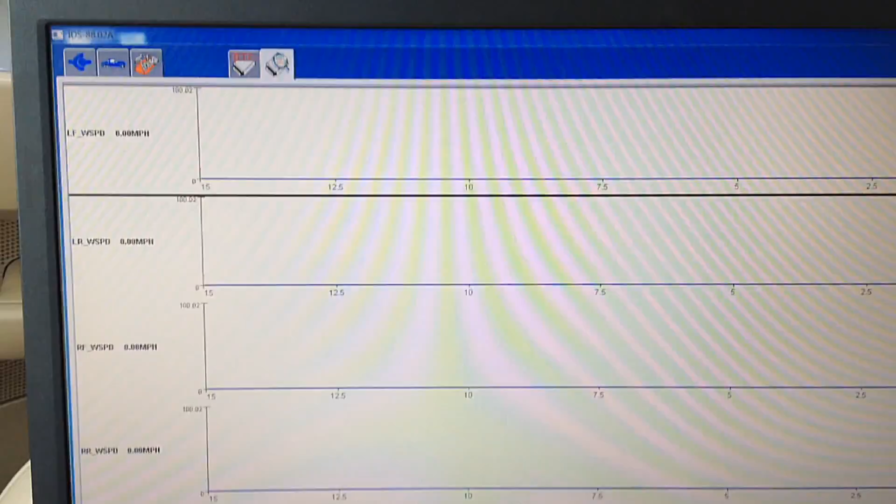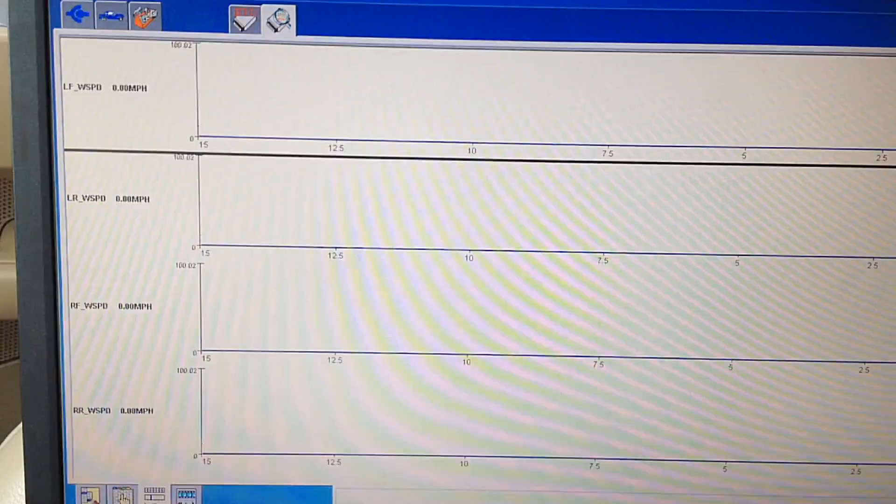Today I got a 06 Explorer, and it has a couple different things going on, but the main concern is the ABS light's on. And also, when the customer goes to pull out, let's say in traffic or whatever, and go to take off, the sensor on the right rear is acting up, and it's activating the traction control. Like it's a traction control event, but it's a false event.

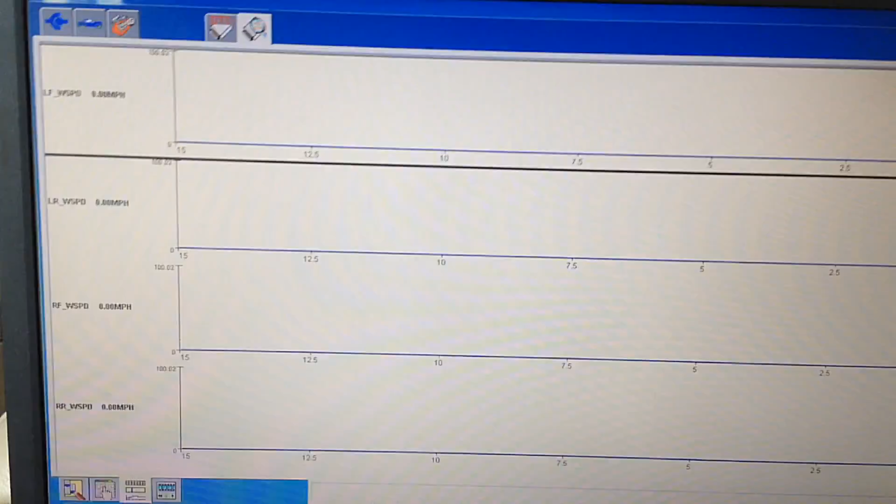And I'm going to go for a drive here in the lot real quick and show you the way it's pulsing pretty consistently. I'm thinking we have a cracked tone ring. The rear tone rings on these Explorers, the new ones. The old ones we had no problems. On the new ones, 06 on to 10, we had problems with the cracked tone rings. Mainly 06, 07. And in the rears only.

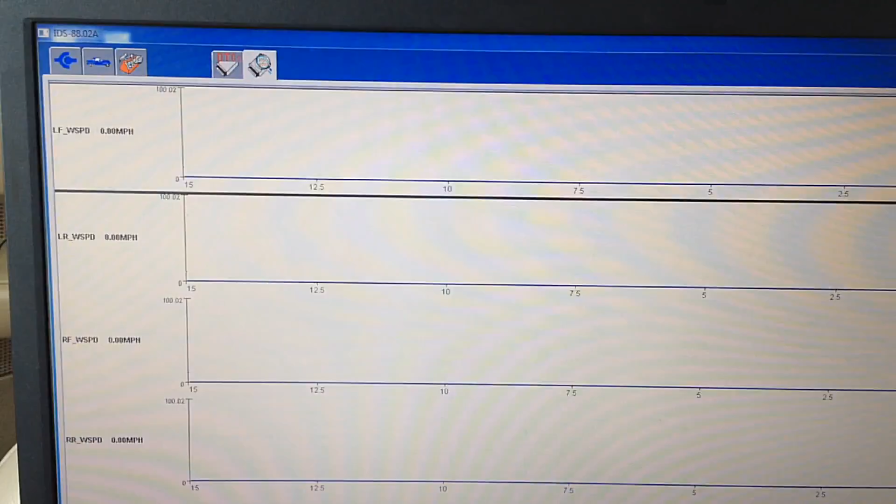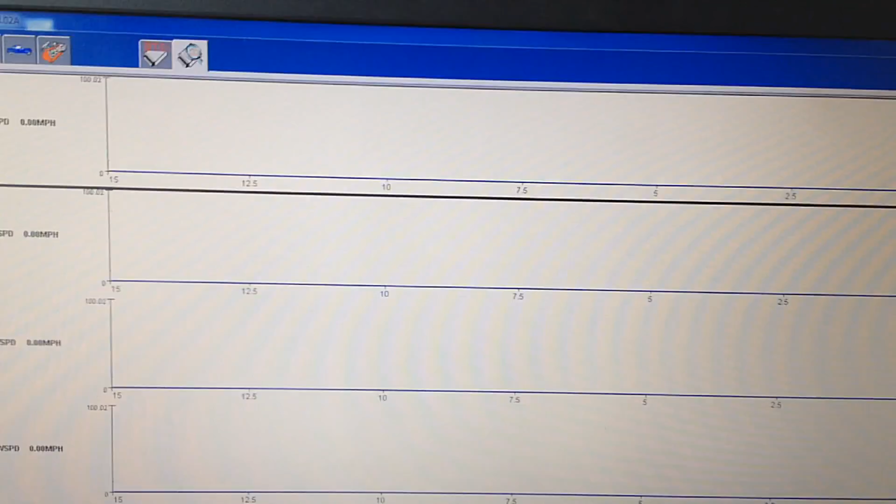So the one we're looking at is the bottom one, the right rear, and you see the rest of them come up, they're smooth, they're mirroring each other. Same thing, and then the bottom one's just twitching and it's dropping out pretty consistently, like there's a crack and a gap in the tone ring. So I'll go for a drive here.

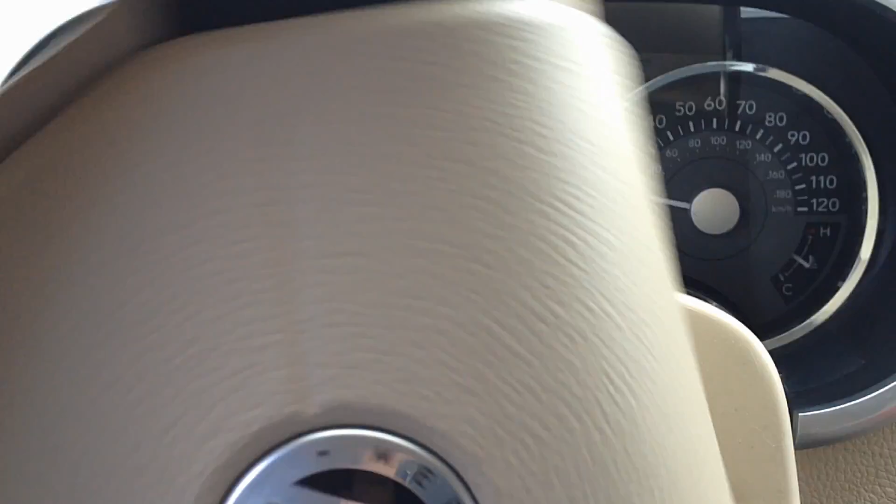You can see it's activating it, even though we're on a perfectly dry road. It's got no ABS lights as of right now because it's reading it enough. And it's causing that traction control to come on, which can be pretty dangerous going out into an intersection or whatever. So it's a good idea to get it fixed.

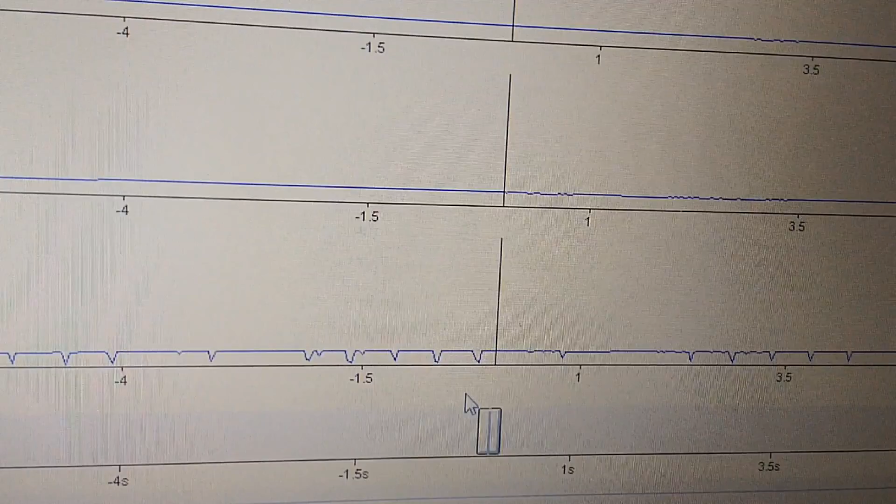So as you can see, for this right rear sensor, it's dropping out pretty regular on there, as long as I kept the speed right. That one. You can see the dropouts. This is what the module is seeing, whereas these ones are smooth and the module sees no problems. Well, the module software is kind of dumb.

Yeah, it flagged the codes because at some point it lost it for too long, but at this point it thinks, hey, that wheel's slipping, or that wheel's locked up, and it'll just activate that traction control or your ABS when it's not required. It's a false activation.

So this is pretty consistent with a tone ring that's cracked and has that wider gap between the teeth, and it doesn't induce any voltage, and therefore it drops out like that. Whereas otherwise it's fine, and these ones are of course fine. So I'd say let's go back to the shop and we'll check it out and see what's going on back there.

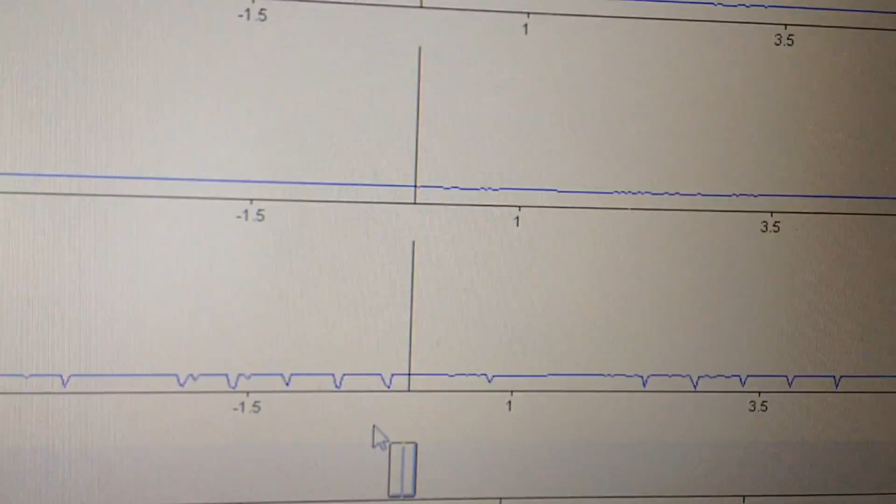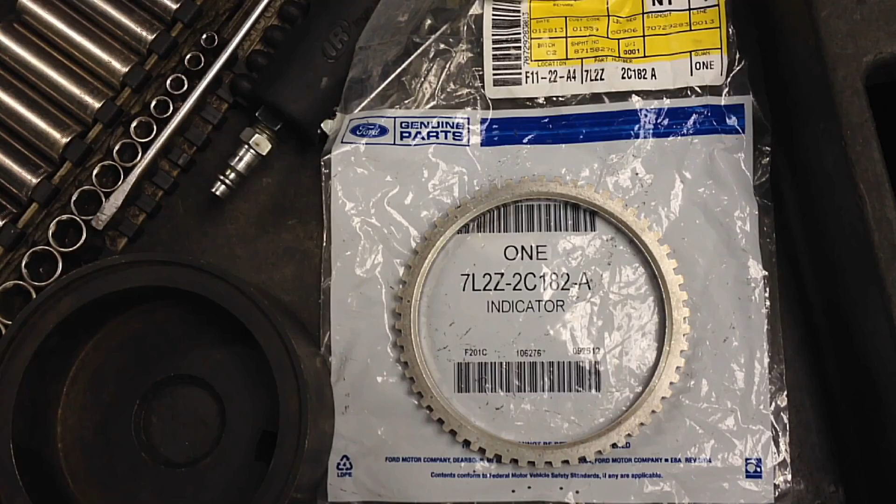So I crawled underneath here, and the first thing I noticed is that the tone ring was loose, which obviously is because the ring cracked. And I looked on the other side and I could see it cracked right there. And that's that extra large gap that you're seeing in the scan tool as being a dropout.

Alright guys, the Mountaineer came back to get the tone ring put on. We got it in stock now, and I'm going to attempt to film it best I can. I know most parts of it I'm going to need two hands, but you'll get the idea and you'll be able to change it out yourself, since especially on 06 Explorer, Mountaineer, doesn't matter, 06, 07, but especially 06, they've got that real problem with the rears cracking only. And it's a common enough problem. Figured I'd show you how it's done.

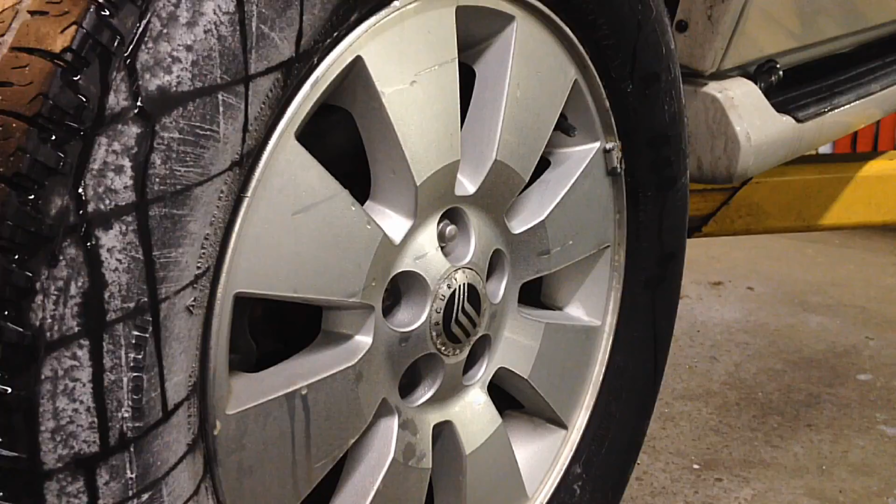First things first, take your tire off. They're 19 millimeter. Get that out of the way. Alright, next we need to pull the brake caliper off. There's a 10 mil here and down below. Undo those, and then we're going to compress the caliper a little bit.

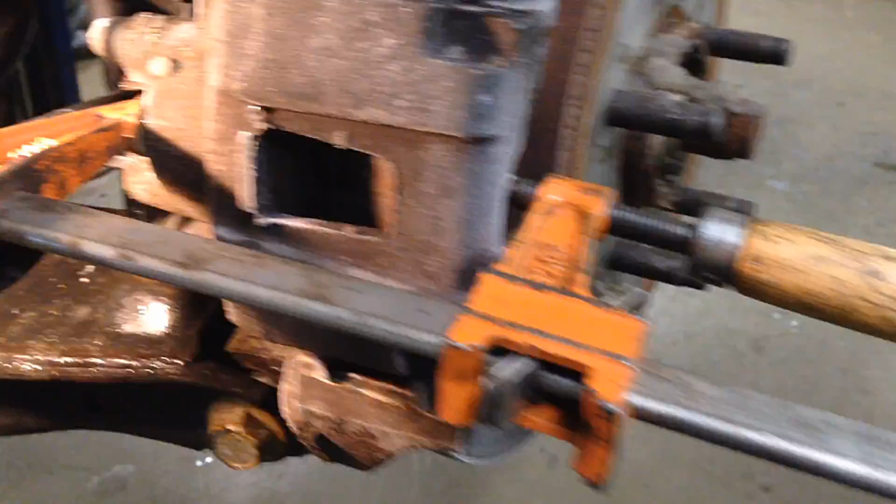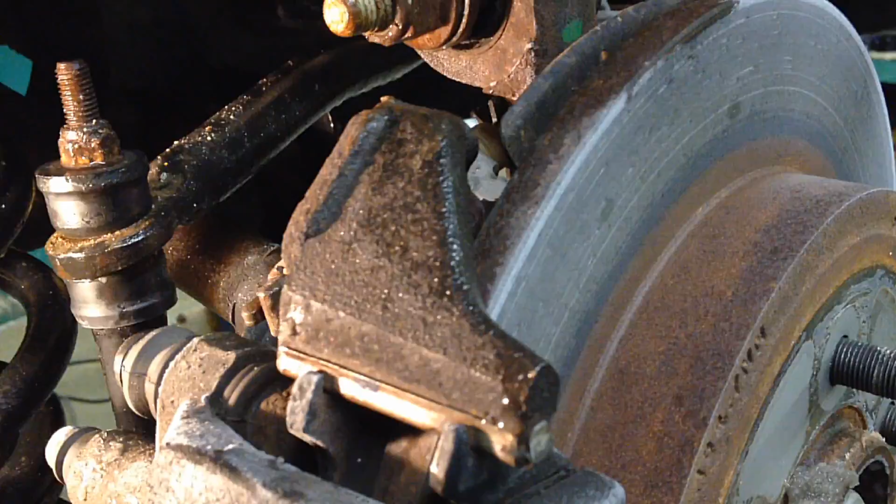Now we're going to take our C-clamp or wood clamp, whatever you got, just like that. We're going to compress it just a few turns and push it in just a little bit so we can get this out of here without it dragging on the rust ridge. Get something down here where the anti-rattle clip is and compress it up, and then pull on the bottom part of the caliper at the same time, and then the whole thing will just come out like that.

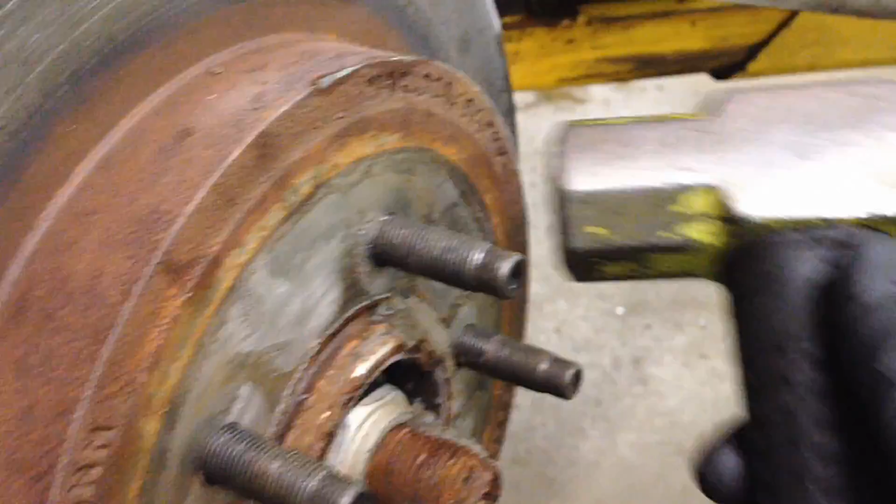Right here you can see that cracked part where it's separated just a little bit better than earlier in the video. You can see it. And once that's cracked, it loses its press-on fit and it moves. Next thing we need to get off is the rotor. Give it a slight hit with your hammer, and that'll break it free from the rust bond.

No matter how good or bad this stub that sticks out from the half shaft looks, always spray those threads with some kind of rust penetrant. Let it soak for a minute or so. Once the rotor is removed, we can pull the axle nut after it's soaked for a while. It's a 35mm.

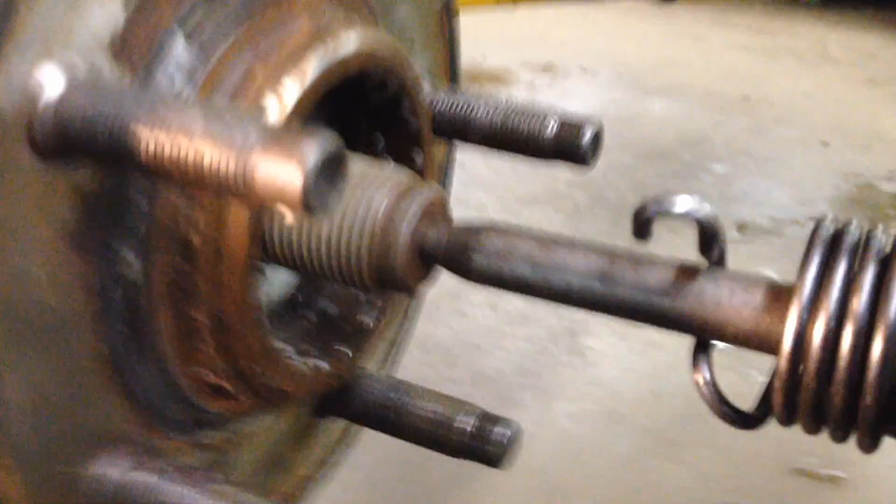After the nut's off, we need to press that axle shaft back in. I use an air hammer right there in the center. Works perfect at vibrating it out. This top bolt, loosen it, but don't take it out.

They're 15/16. Okay, we're underneath the vehicle now on the back side of the hub there. This bottom toe link right here, we're going to back the bolt out. Like so. Just enough. And you shouldn't take the nut off. It's 15/16 both sides again. And leave it in like that.

And that is just getting it back in there so we have access to these bolts, which we need to take out to flip that knuckle up. So we're just pushing this back to get it out of the way. Alright, pull these 3 hub bolts out. 1, 2, 3 that hold the knuckle to the trailing arm here. They're 13/16 and they're really in there tight, so be ready for them.

Alright, back down to the ground here. Put a jack under the lower control arm, right underneath the spring here. And support, got a little cup to it right there. And then this should be the last bolt we need to do before we flip this whole thing out of the way. It's a 15/16.

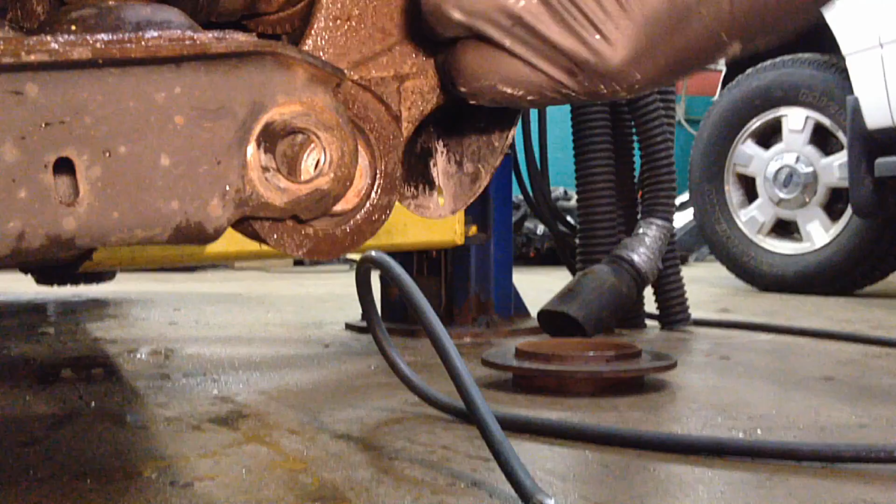Should be able to take it out with fair ease if you got the spring pressure off, like I do. Just a couple pumps up, and it takes the pressure off this whole assembly. And it'll hold it, and then we can flip this out. Now you'd be able to take this whole knuckle and pull it out like this and up. Let's see if I can do this. Push in your half shaft at the same time.

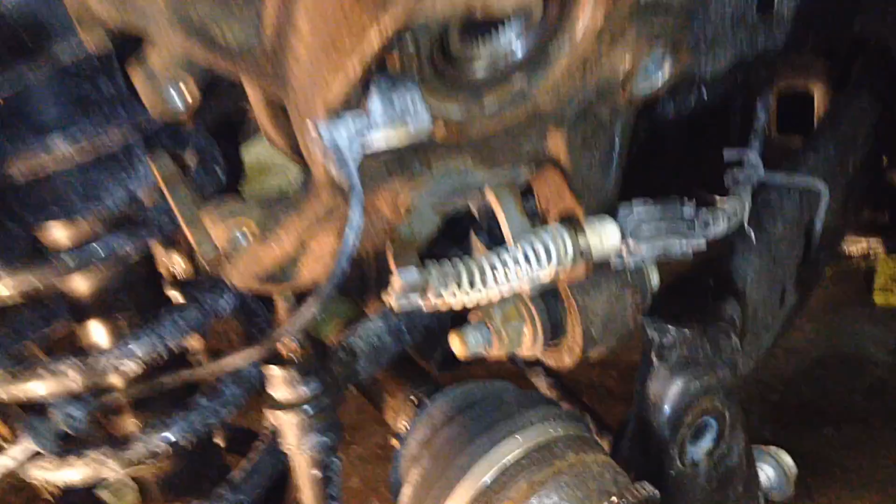See, hopefully, get out of there. Better angle. Right up and out of the way. Alright, so once you got it loose from the lower arm, those 3 bolts are out, you flip it up. Just like that. The way I got it staying there, this is fine. It's not going to kill the bushing while you're just doing this real quick.

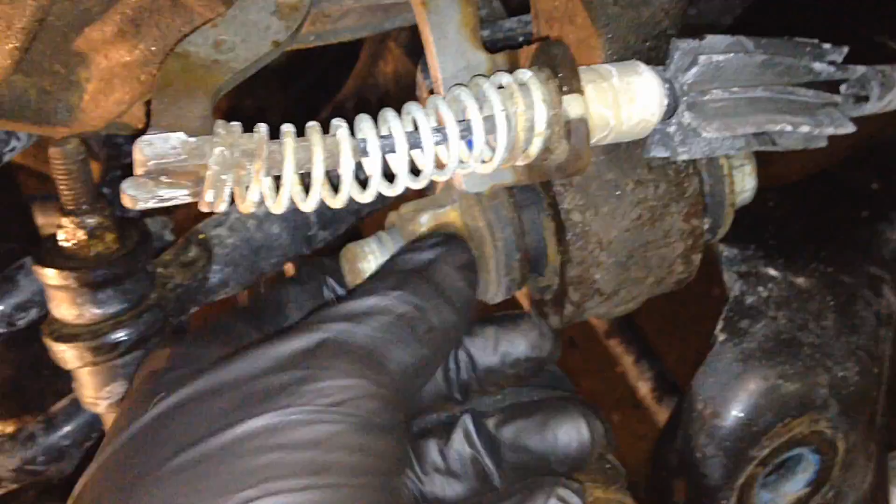This 15/16 on both sides that you loosened earlier, the bolt that goes through there, flip it all the way up. All the way up. And while it's all the way up, cinch this bolt back down. And it'll hold it up for us. Now if yours is cracked like mine, it'll literally just fall off like this. And then right here where it seats, this isn't heavily rusted, but you still want to clean it up. Scuff it up, and then we'll clean with brake clean.

Alright, I got it cleaned up enough. I put a real slight amount of grease all the way around. Just going to keep working it all the way around. Real slight, and it helps ease on the new one. It's not going to cause it to slip off or nothing like that. Just a real light coat. I mean, you're pressing it on there pretty tight, so...

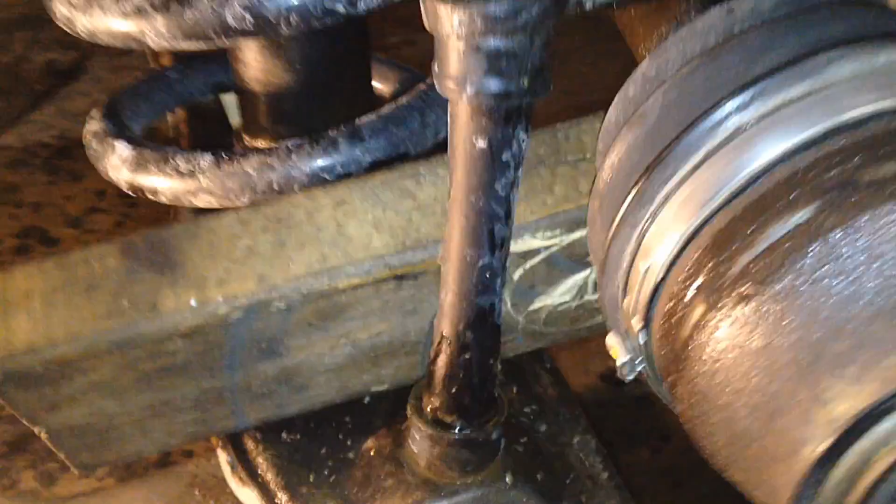Now it's time to press that ring on, and instead of fighting this end from flopping around and being sunk down in here, a regular old 2x4 back in there, on the shaft, and it goes on top of that toe link, and it supports it so that you can press that ring on properly and do a good job.

Now what you can do is heat up this tone ring with like a propane torch, nothing too hot, and get it a little bit expanded, and then you can tap it on all the way around with the hammer evenly. Just be patient and it should go on.

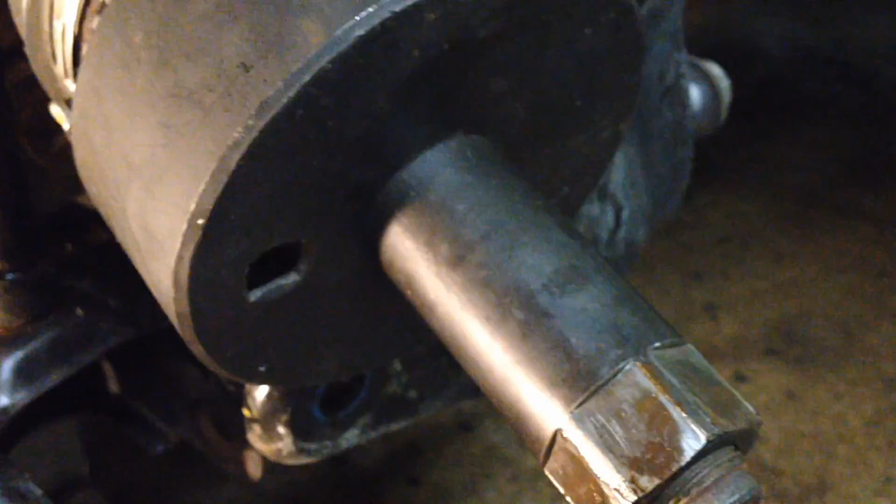We got the fancy press tool from Ford. It's a forcing screw and the disc here that actually cups that ring just right, and this centers it so that it goes on there nice and even. We're gonna go back to that ridge right there. You can see where it stops. Use that as a guide.

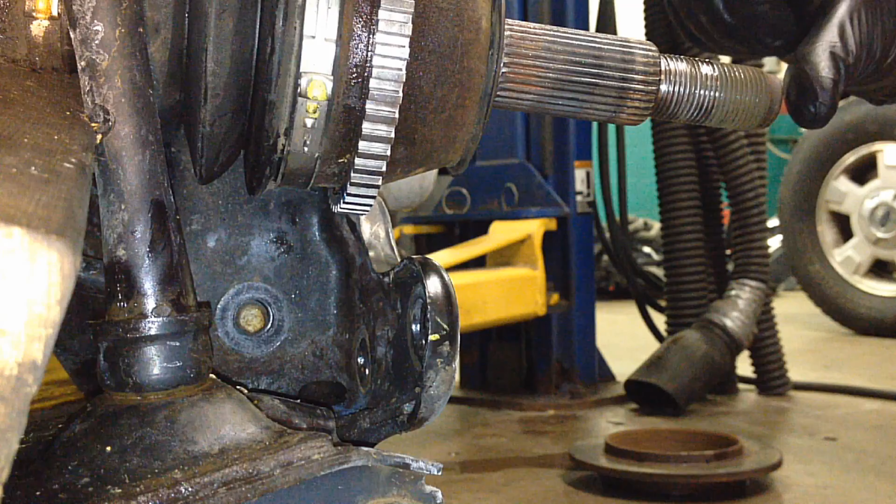Now the spec for this is 150 millimeters from the absolute end of this to this side of the tone ring. I put something flat against the end, and this thing's exactly 150 millimeters. It's plus or minus 1 millimeter, and I'm right at 150. Yeah, actually it's perfectly 150 right now. And that was just a guess. So we're good.

These, unlike the Escapes, can't go all the way back till they stop. You actually have to measure them. And I suggest you get a ruler with millimeters on it. Top bolt up here that you pinched off earlier to hold the knuckle up. Loosen it up again.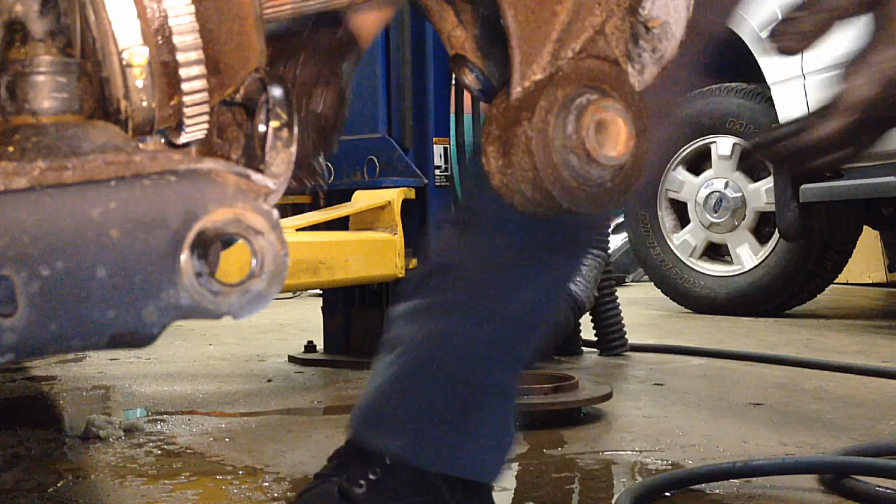Made it back up again. Get it through there and splined. Lower your knuckle through the lower arm here. We can line that bolt up and get it back in there.

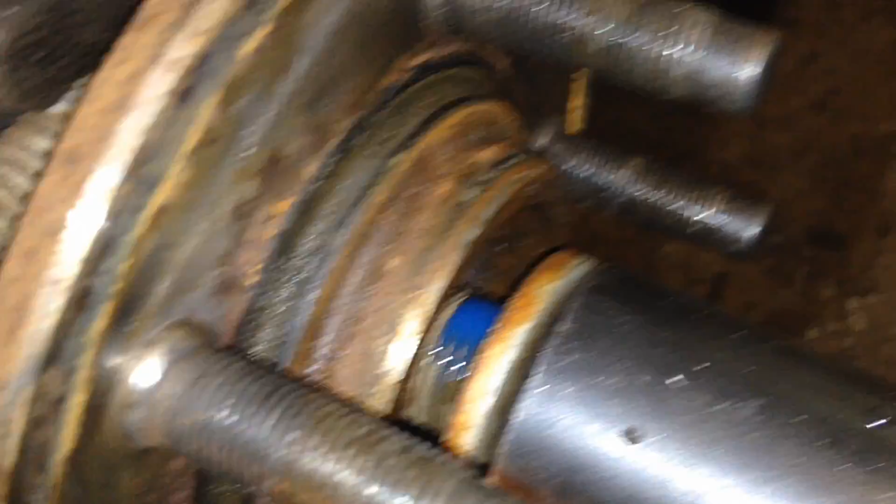Might tweak it a little bit, and I'll go through the other side, and then you can put your captured nut back in there. This sticks into the arm, kind of like this one, but on the other side. At this point, we can do a pre-check of our alignment by fully sucking in this half shaft. And if you're going to reuse the nut, make sure you put Blue Loctite on it. We're going to cinch it down, and then we'll torque it again later on once the weight of the vehicle's on, like it specifies. So let's cinch it down.

Okay. Now we can check the alignment of the sensor, and it should basically be centered. I mean, it'll pick it up. And you can see this one's perfectly centered, and we'll get a good read from that tone ring.

Back underneath here, we need to get these 3 bolts back into that knuckle, to the trailing arm. Get your first one by moving the trailing arm around, and then we can worry about tweaking the knuckle up to get these other 2 in, and we'll use this one as a pivot point. So get this first bolt in, thread it in, you know, halfway at least.

So what I do to get that top bolt lined up, we'll do the next easiest one to get to, is get a pry bar, and you're on the upper toe link up there, and then you're prying against the lower toe link right here, and you push towards the front of the vehicle, and it will move the top part of the knuckle to the rear of the vehicle, and it will align that hole, and you should be able to get that one in by hand, no problem. And now this one should be lined up.

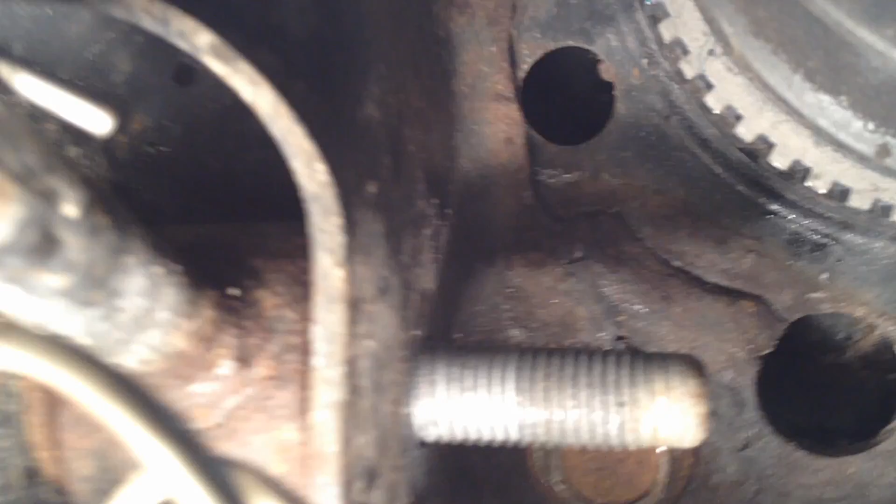Once you got all three of these in, tighten them up, put Blue Loctite on them. They're 203 foot-pounds. Once you got those 3 bolts in and torqued down, Blue Loctite, tap your lower toe link back in. And then put the nut on it, but don't tighten it at this time.

Once again, jack it up, all the way up until the full weight is sitting on the jack, so we can compress the spring and get it back to ride height before you cinch down these bolts, which puts stress in the bushing, so we can put them at a neutral position at ride height.

Once you got it up, this bottom one for the lower control arm is 205 foot-pounds, and this one, the lower toe link, is 260 foot-pounds. This top toe link bolt is 166 foot-pounds. Do it at the same time. Again, use Blue Loctite on everything that you're going to be reusing, any bolt you're reusing.

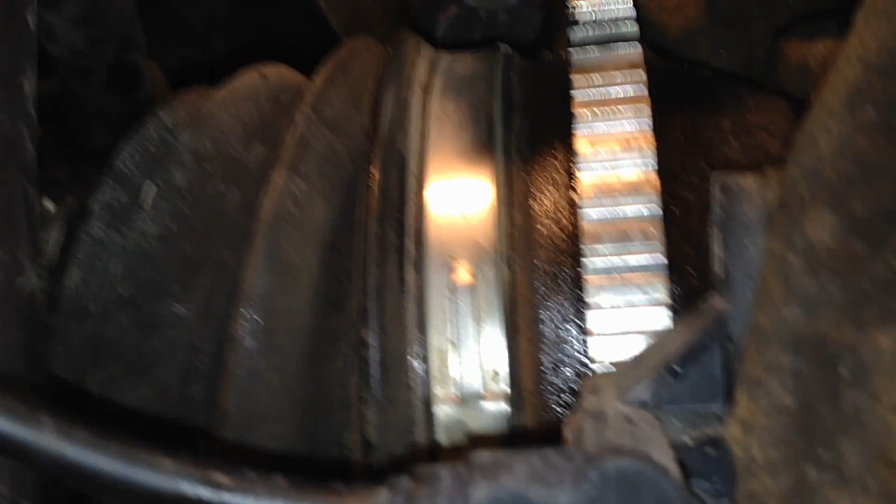One thing I just want to note is that this one on the driver's side, I looked at them, compared the two. The ring on this one's a lot smaller and thinner and all that, the stock ones. And then you could see our new one, it's a lot beefier. So this should cure the problem and be the last time you got to press one of these on.

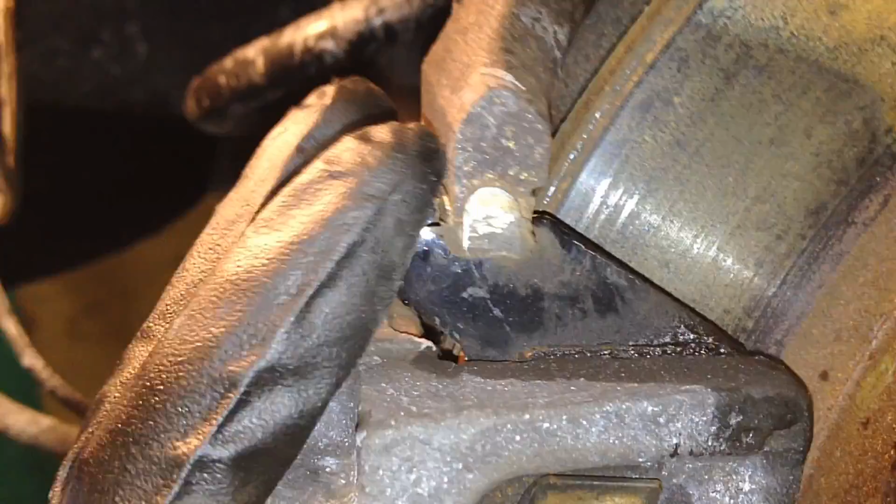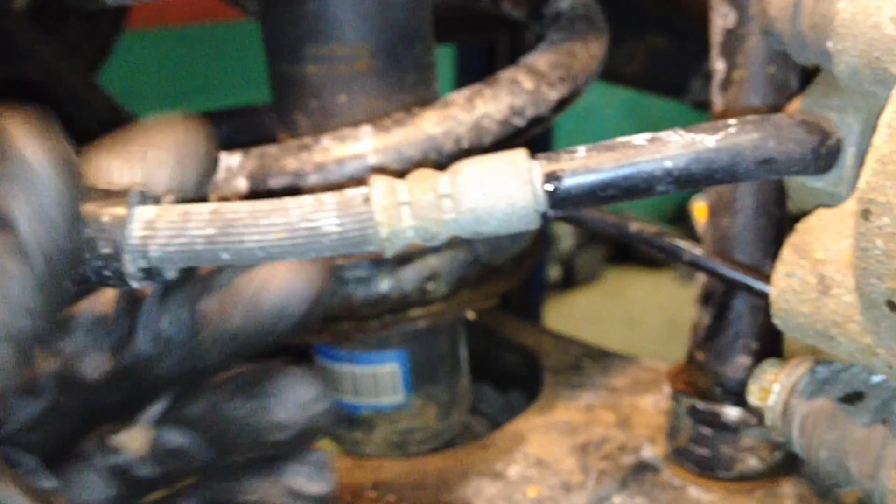Put your rotor back on, your caliper. Remember it hooks in up top here. Focus there. Hooks in, see the pad? And then the bottom slides into place. And then put your bolts in. They should thread in by hand, no problem. And that'll tell you that the caliper is fully seated. And then don't forget your ABS sensor wiring back onto the hose in case you disconnected it. Don't want that dangling.

Pop your center cap out from the back side here. Just pop it and it'll pop right out. And then we can get access to that axle nut when we have the weight of the vehicle on the ground. Torque it down to 205 foot-pounds. Now you can apply the parking brake and do it up in the air, but they recommend to do it with the weight of the vehicle on it. Torque your lug nuts down to 100 foot-pounds, and then pop that center cap back on. We can go for a test drive.

Alright, so ABS codes. The light will actually clear by itself once you achieve 10 miles an hour or more, and it's reading all 4 sensors and any other sensors on an AdvanceTrac system. Everything checks out after 10 miles an hour. It will auto clear the light. The codes will still be in the module itself, but the light will go out, and that's an easy indication. It's kind of like the airbag lights. They're always monitoring. Same idea, the ABS is always monitoring, and it'll turn the light off once everything seems copacetic.

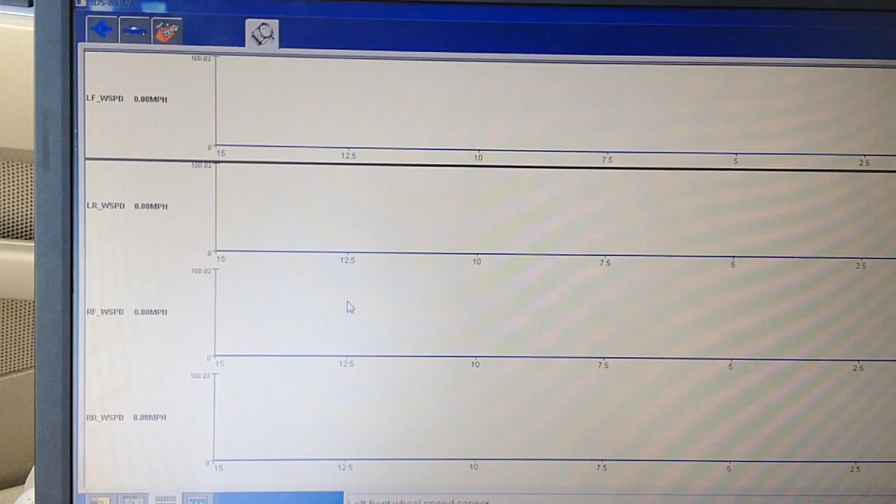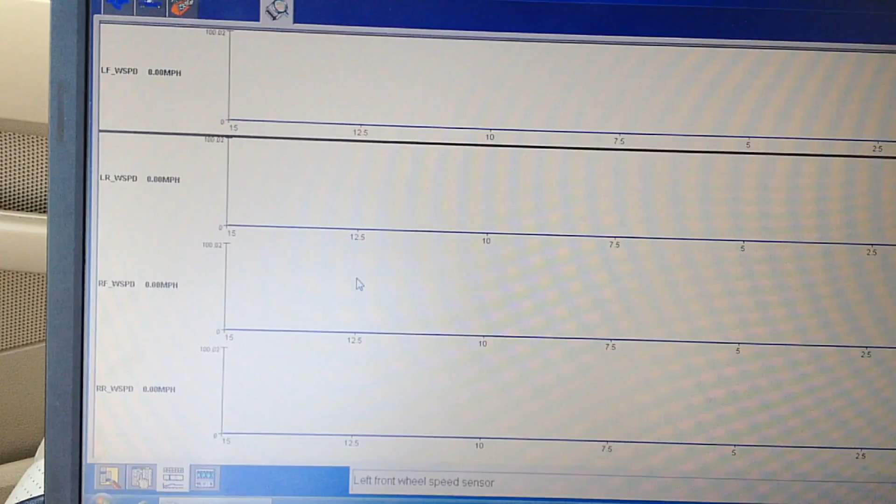So this one, I drove it around, and I got a good read on the sensor, and they're all smooth, all 4 of them, and the tone rings all lined up. We have no spikes or dropouts. So this one is definitely fixed. We saw the cracked tone ring, but you never know what else might be wrong. But you got to fix what you see and go from there.